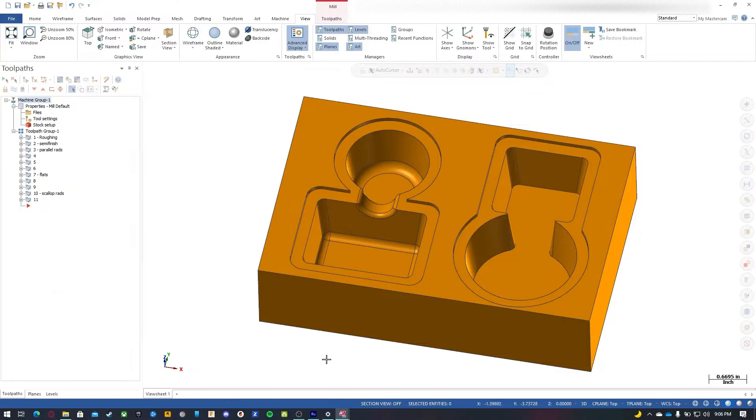Alright guys, now that we're back, I'm going to throw in my step file. Mastercam can import just by clicking and dragging a file. So now I've got my solid imported already. You can also open using this, or even clicking on merge, and select your SolidWorks file, a step file, STL, or anything like that.

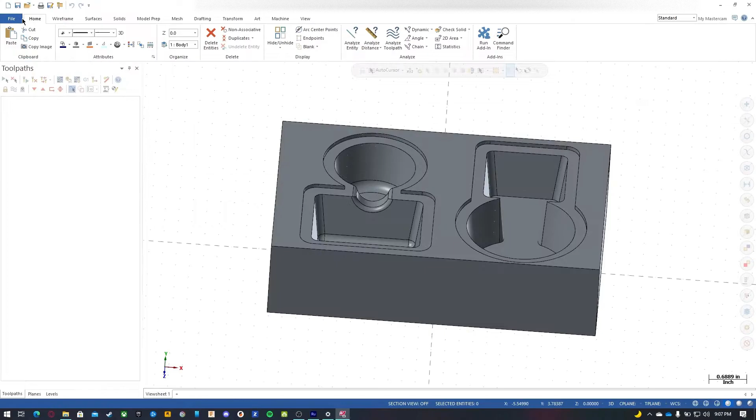For instance, if I want to just open this file, I would click open, and I have to click all files, or if I knew the extension to my file, I can click on step, and that will give me the available files.

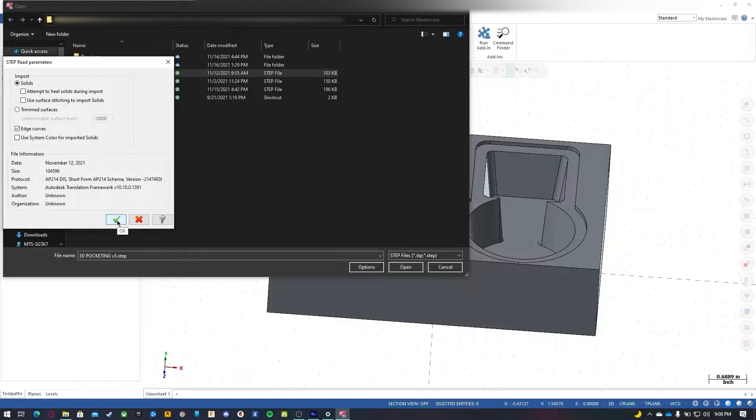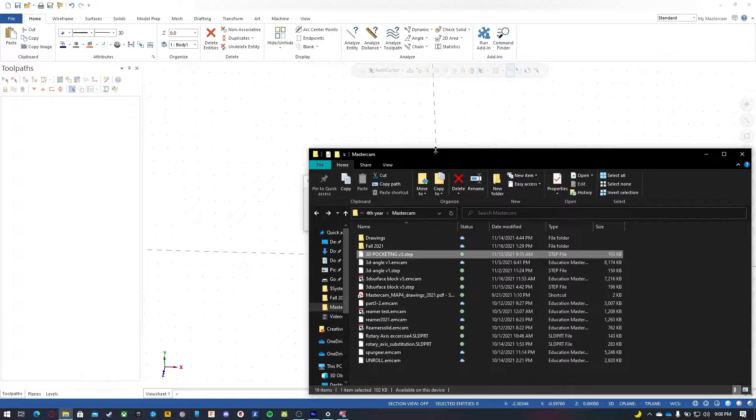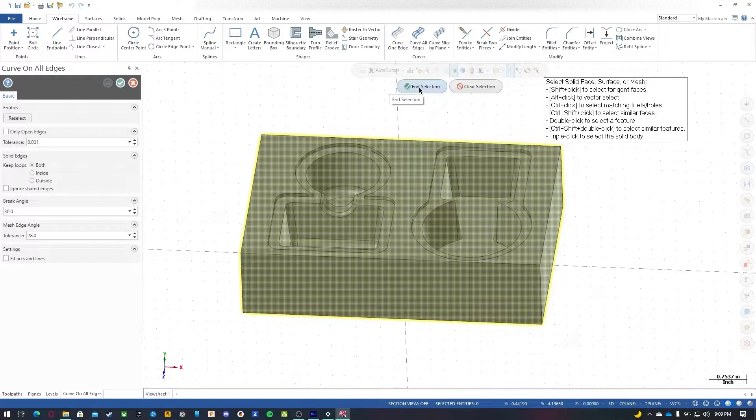Now if I imported my file and it didn't have any lines, what I can do is go to my wireframe and click on curve all edges. Now I can triple click to select the solid body, and then I can move this window out of the way and click end selection. Now this is going to put all my outlines on everything. That'll be helpful for doing our boundaries for later.

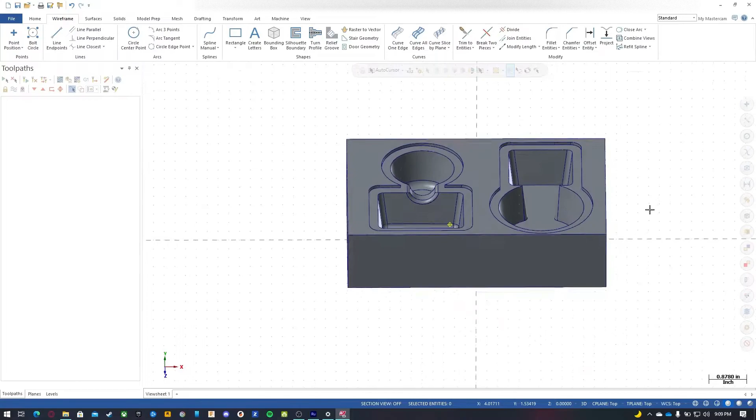So since I've started with a new file or part, my geometry needs to be oriented. If I click on my top view, that is actually my front view. So what I want to do is rotate this so that the pockets are facing the top where the spindle would be. A quick and easy way to do this would be to create a new plane off of a face.

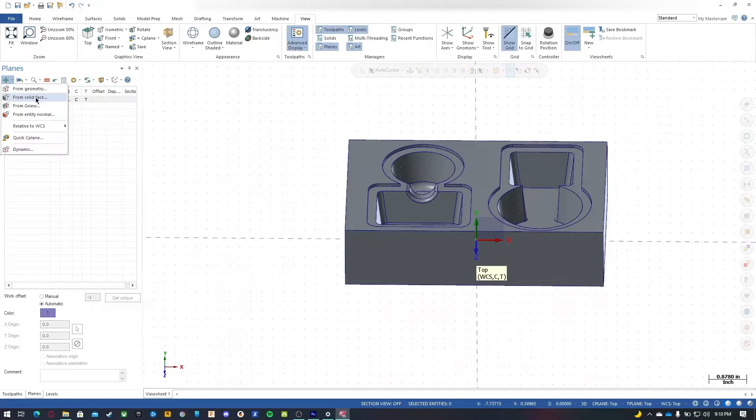So if I open up my planes manager down here, if it's not open, we can go to view and select planes manager right here. I'm going to click create a new plane, and we're going to select solid face. I'm just going to select that, and I want to orient it so that my X is to the right and my Z is pointing upwards. Then I can click OK, and I can name this pocket surface. So then I'll click OK, and now my grid is sitting right where I need it. That's probably the quickest way.

In other situations, you might want to actually orient your block by rotating it so that you have top, front, and all those views that correlate to the actual surface.

So I want to go to my machine and set default. For this video, I'm not going to show you how to do feeds and speeds, I'll leave that up to you, but I'm going to show you how to get the tool paths.

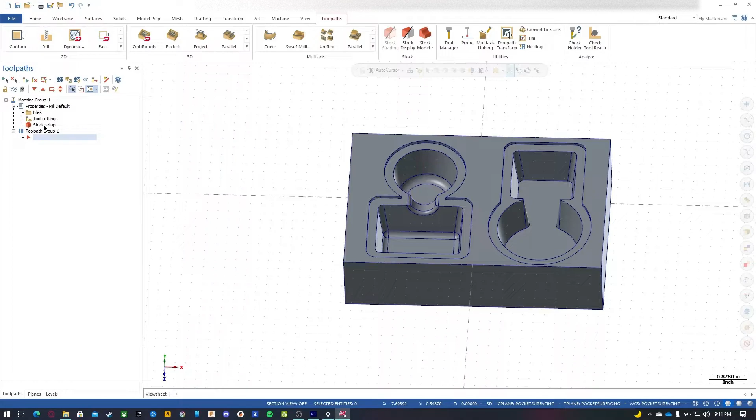So let's go to stock setup, and I'm going to click on all entities. This will enable my stock boundary, and you can see now I have my stock shading sitting within this block.

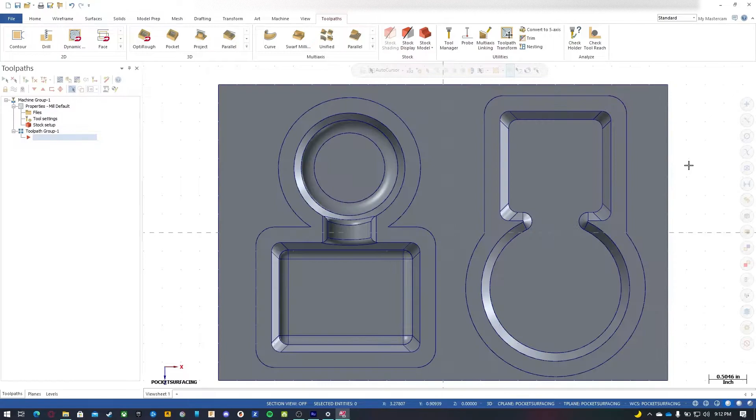So I'm going to turn that off, and I'm just going to click on the top view, and I can press Alt-1 or right click and press this top button. Let's go to tool settings and assign our tool numbers sequentially and warn of tool duplicates.

So click OK, and now the first thing I want to do is rough out these pockets. A really handy tool to use is OptiRough.

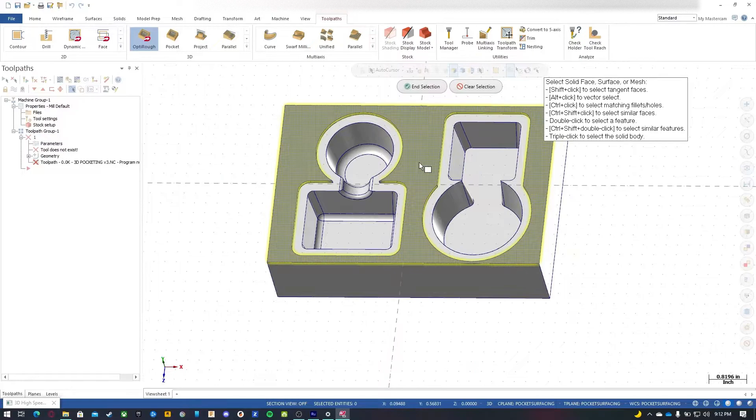Now we come up with this window, and this is going to be our machining geometry and our avoidance geometry. For this purpose, what we're going to do is click on this button and triple click to select the solid body. Now I have everything selected, and I'll click end selection. Now I have 62 entities available.

I'm going to leave 50 thou stock on the walls and 50 thou stock on the floors. We're not going to touch anything on here.

If we go to toolpath control and include our silhouette boundary, that's going to include the outside block boundary and contain the tool within the material. If I didn't have that, it would try and machine the walls. Let's say our stock is already to size, so I want to make sure I have that silhouette boundary, and I want my strategy to be on the inside to do the pockets.

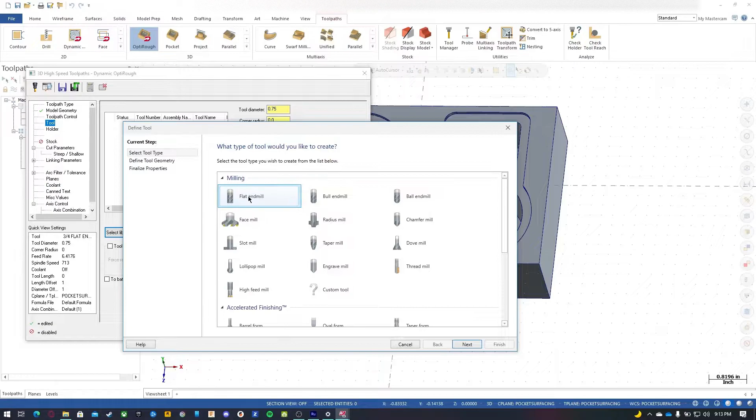I'm going to select a tool and create a tool, and let's go with a bullnose end mill. We're going to say this is a 3/8 bullnose with a 30 thou radius, and we're going to ignore our feed rates for this. So we'll call this rough pockets.

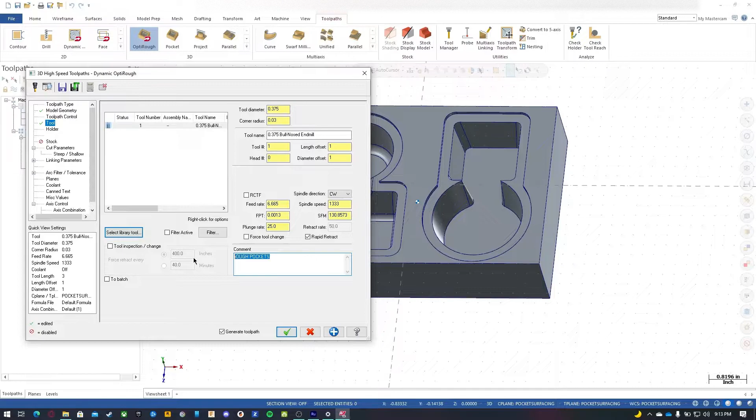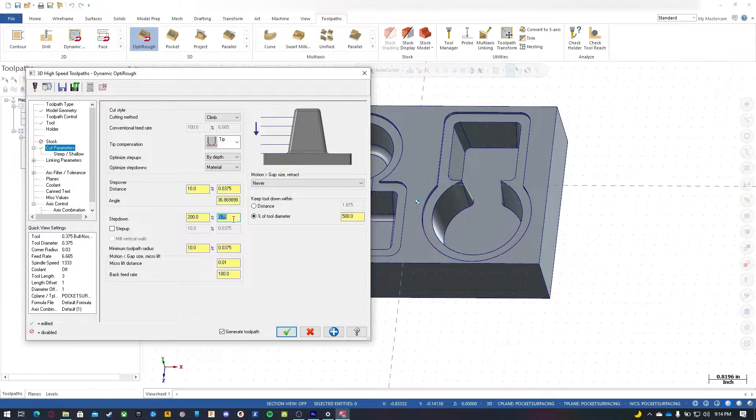My next step is going to be cut parameters, and we'll set our step distance to 10% so we can use a lot of the flute and not wear out the corners of our cutter. I'm going to use my step down and set this at 0.75 inches, and include a step up. So this will go down 3/4 of an inch and start machining as much as it can, and then as it goes up the tapered walls, it's going to step up 37.5 thou.

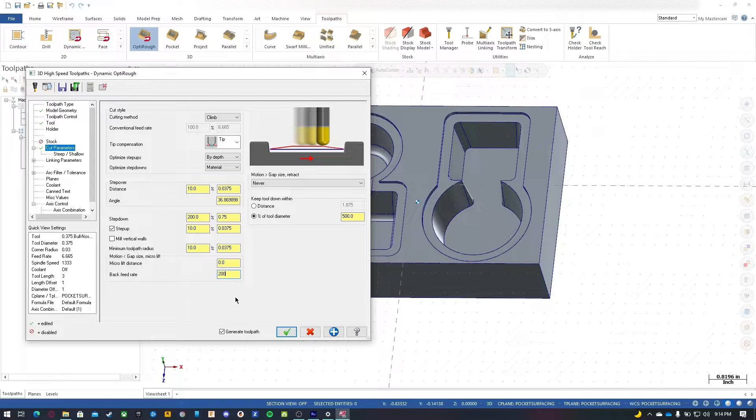My micro lift distance I usually set to 0, and I'll set my back feed rate to 200 or 500. I like to keep my percentage of tool diameter within 500 or 300%, so it doesn't do unnecessary moves. For small spaces, it'll just move over using our back feed rate.

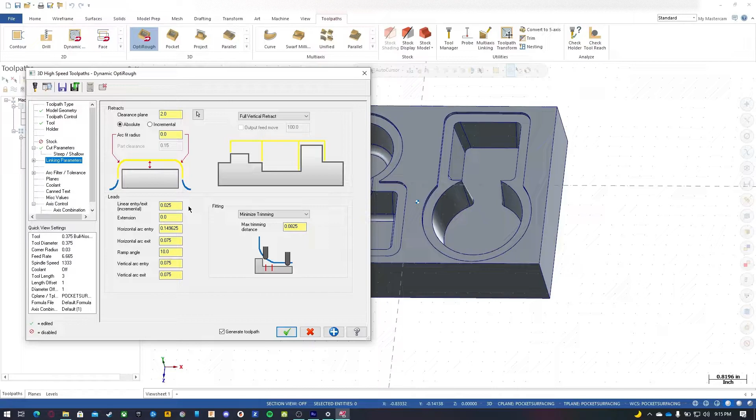My linking parameters can generally stay within the defaults. The only thing I really want to check at this point is my planes, and make sure they all say pocket surfacing.

Let's turn on our coolant and generate the toolpath. Okay, while this is generating, I'm going to collapse that, and I'm going to do a raster.

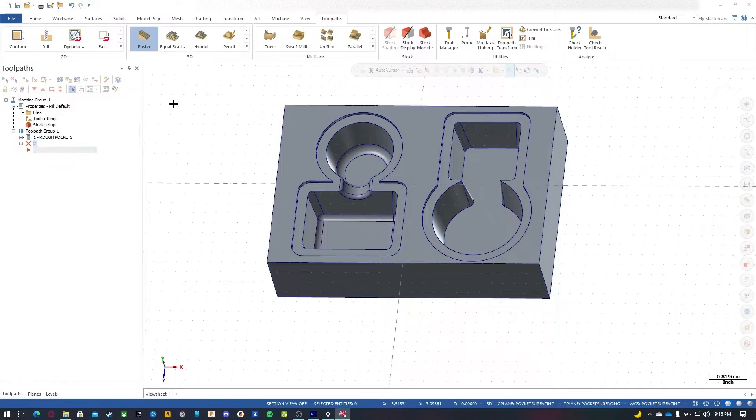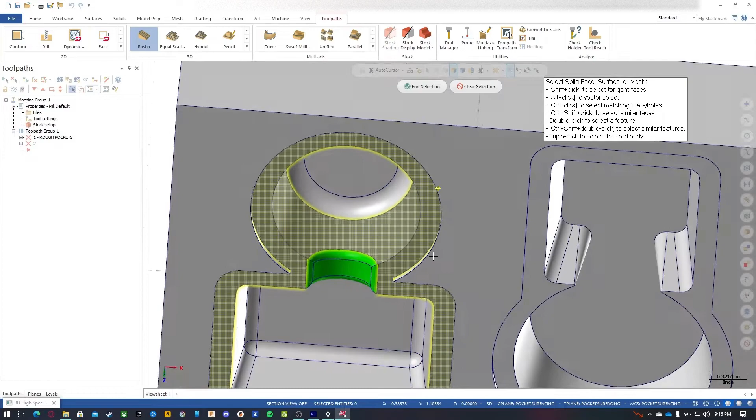I'm going to set this to these surfaces here. Now if I zoom in and roll it around, I should have only those surfaces, and I'm going to set my avoidance region tangent to those surfaces, so anything that touches those machining surfaces. If I hide my dialog here, I should have red touching all of the green. If I press escape, that should bring the window back up. I'm going to set these to 0.

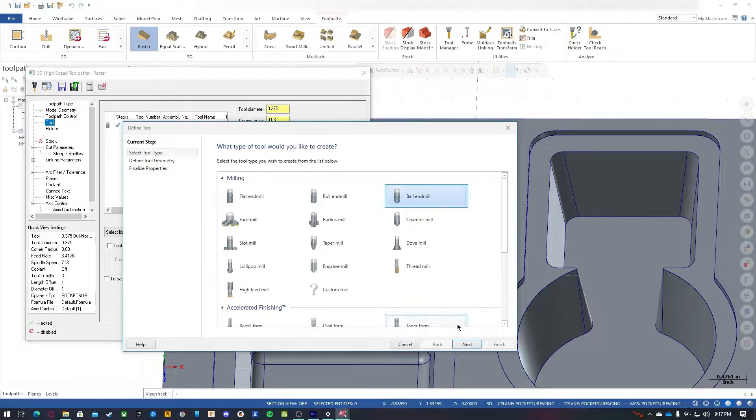Now I'm going to go to my tool and create a new tool, and this will be a ball nose end mill, and this will be a 1/4 inch. I'll click finish, and we're going to do a parallel on this small section.

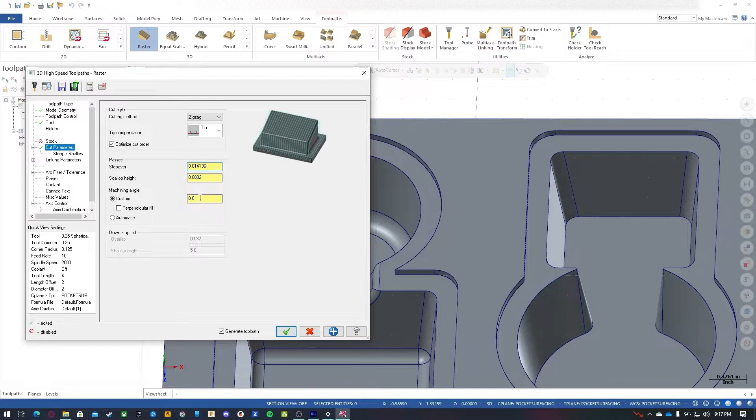So I'll go to my cut parameters, and I like using zigzag. I'll set my step over. This is usually pretty good surface finish with a 2/10 scallop height, which makes our step over end up being 14 thou. And we're going to leave our machining angle at 0.

We're going to go to our linking parameters and just verify that these are all within the defaults. If you've changed anything, you might have a good reason for doing that. If we go to planes, we should have surfacing, and we'll turn our coolant on and click OK.

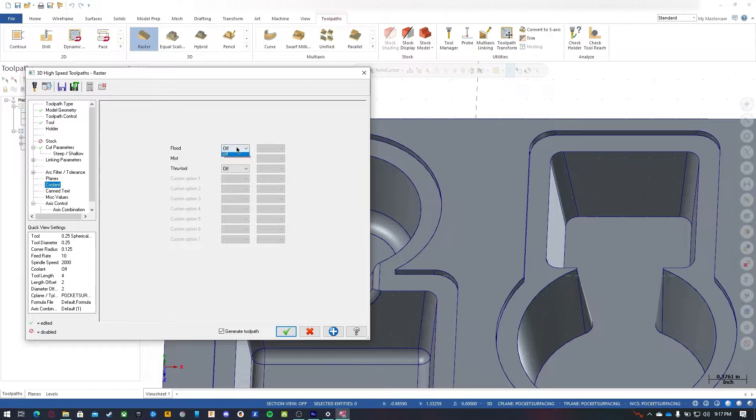So this is what my parallel toolpath looks like. But let's check our rough pocket since it was generating. Now we have some material being faced across the top, so I don't really want that. That's unnecessary for what we're doing.

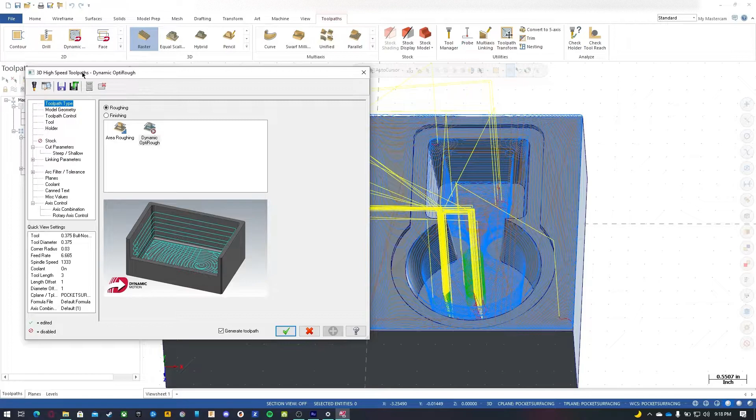So I'm going to go back into my parameters, and I'm going to go to my steep and shallow and set my minimum depth to -1 thou. Now this is going to generate, and it's going to do everything within the pockets now.

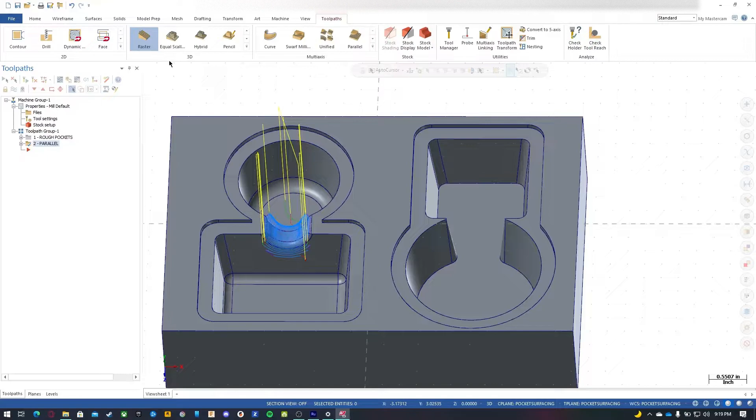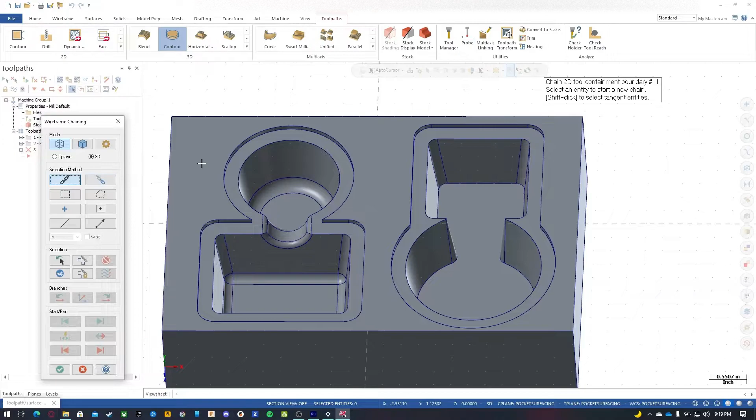Alright, so now that we've got everything generated for my roughing application and my parallel, I want to contour my pockets in here. So I'm just going to go to my contour, and I'm going to select the entire solid, so I'll triple click and end selection. So I have my drive surfaces. Now I'm going to set some containment boundaries. Now I can select using the geometry on the part.

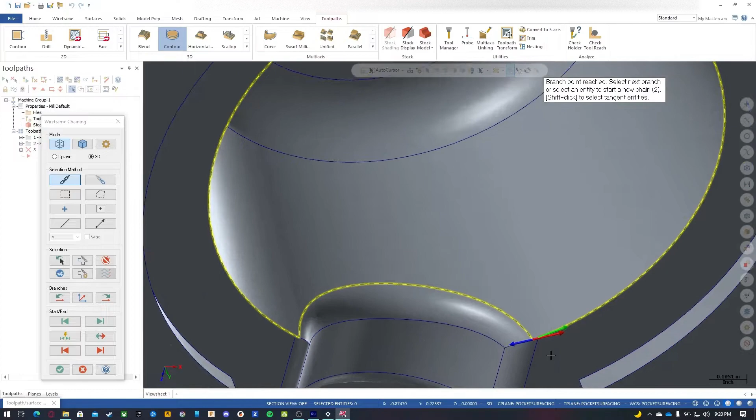Sometimes there might be really obscure lines that you need to chain, so I'd have to zoom in really far to get to this one. You can also click on the red arrow or even the blue arrow, and I just want to have this meet up with this green arrow. So then I have a blue and a green arrow, and that is my boundary.

So I'll click OK, and I'm going to use the 1/4 inch ball nose end mill, and we'll leave these as default. Now my maximum step down, I know that my scallop is going to be 14 thou. If you didn't have a tapered wall, it would be okay to do a larger step down. I'm going to go to climb and one way, and I will also use my follow surface.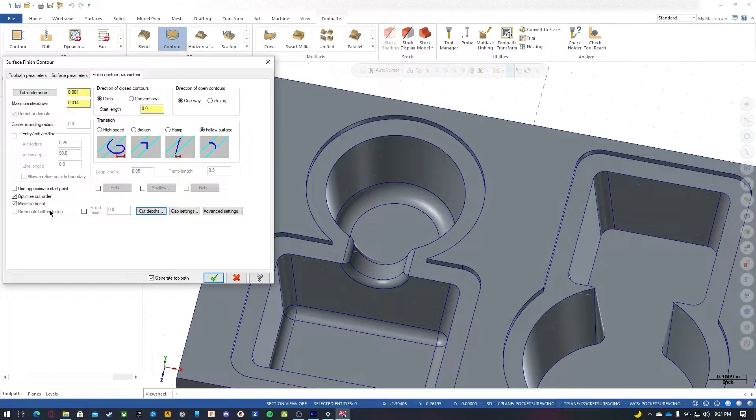So this is going to run around the edges and then follow the surface. I'm going to select optimize cut order, and then I'll click OK. Now this will generate for this smaller section. It might be wise to set up your toolpaths in sections so that you don't generate too much and then have a crash. Mastercam has some issues with generating toolpaths and crashing, so if you limit the possibility of it, it makes it a lot better. So let's call this contour round.

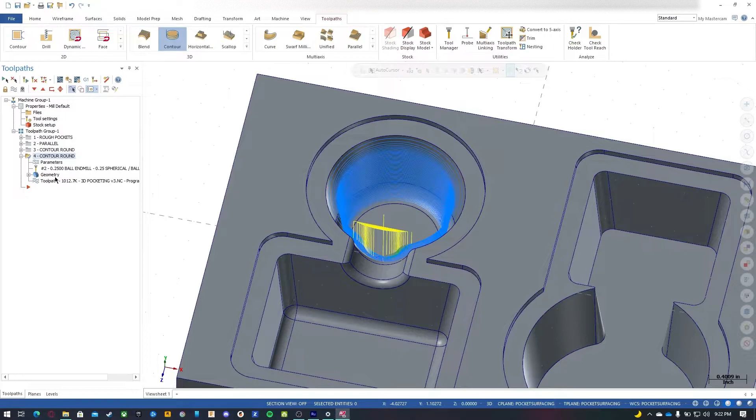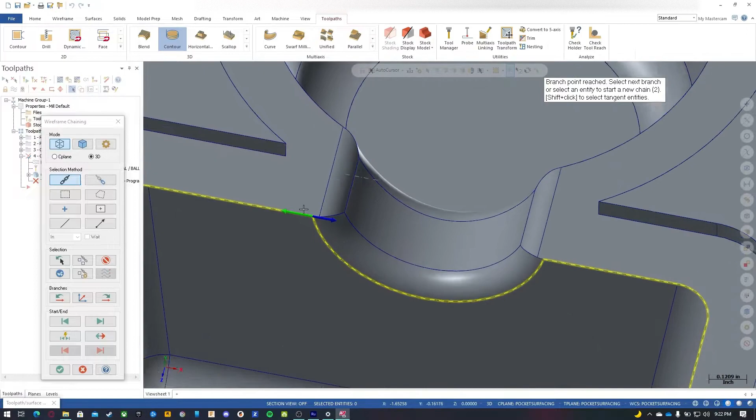And I want to copy this and paste it, and select a new containment boundary, and that's just going to be this one here. So I'm just clicking on the red arrow to go around, and I'll have to zoom in to this section here, and we'll go around our paralleled section. So click OK, and then we'll have this generate.

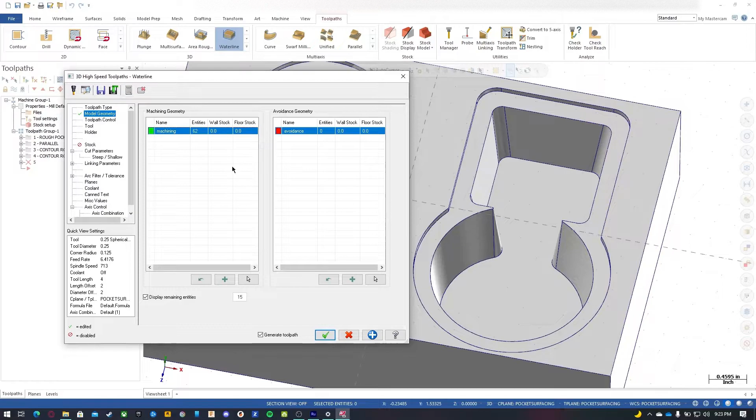So my next path, I'm going to use a waterline on this one. We click expand gallery, and we'll use waterline, and we're going to select the whole solid by triple clicking. We're going to set this to 0 and 0. And then we'll set our boundary chains, and if I change this to C-plane, then I can pick that chain. Otherwise, if I were to click 3D, it's going to stop at each branch. So to make it easy on you, you just click C-plane, make sure the chain is selected, and click on that.

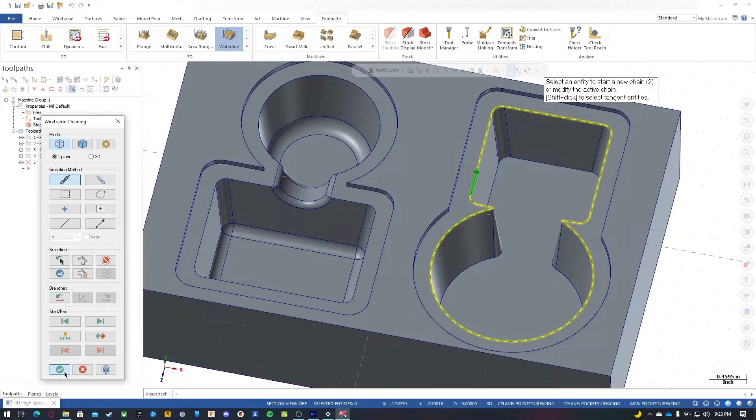Now I want to make sure I have tool contact points selected. That means if it goes outside of the boundary, the only reason it goes outside is because of the tangent point of the radius. We're going to continue using our 1/4 inch ball nose, and we're going to waterline a large pocket.

We'll go to cut parameters, and we're going to go from bottom to top, one way and climb. Actually, let's go climb spiral — it gives a little more gentle movements. My step down is going to be 14 thou, so we figured out our scallops. And we don't need to add cuts because we don't have any other tangent walls that might change angles.

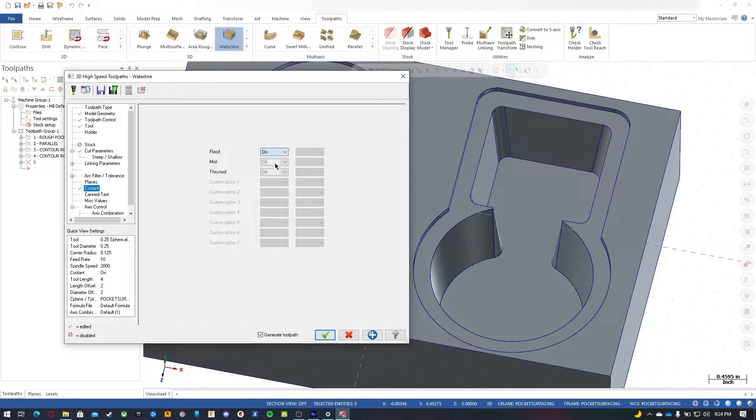You can also have waterline step over on floors like this. I wanted to go to my planes, make sure that those are good, check my coolant, make sure that's on, and click OK. Now this is going to go from bottom to the top upwards.

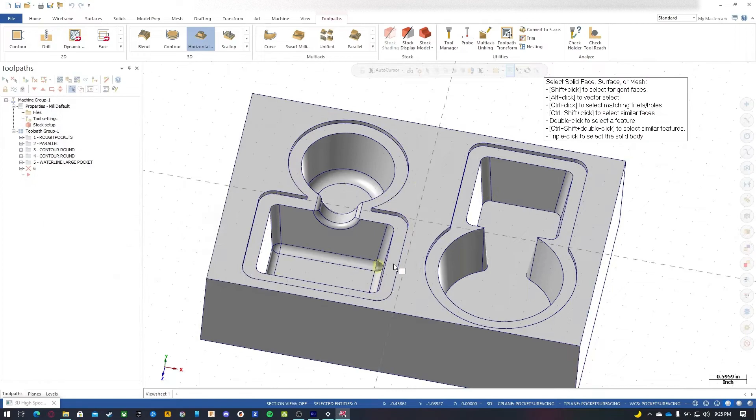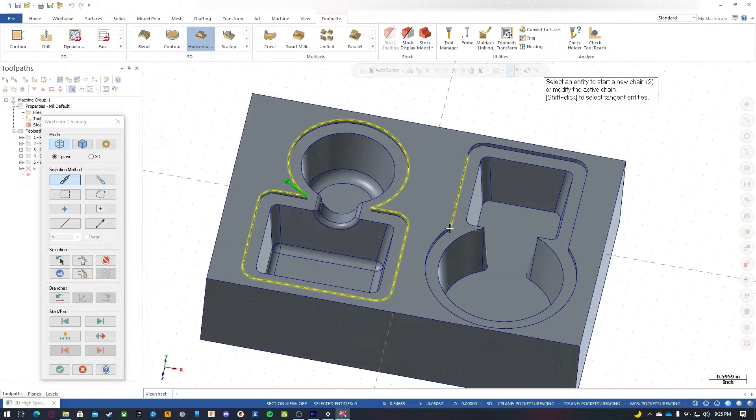Now my next toolpath, I want to cut these flats. So I want to go to horizontal. Once again, I'm going to triple click on the solid and set these to 0. Now my toolpath control, I'm going to set my boundary chains, and we're going to use the C-plane boundary, and I'll use that one and that one. Click OK.

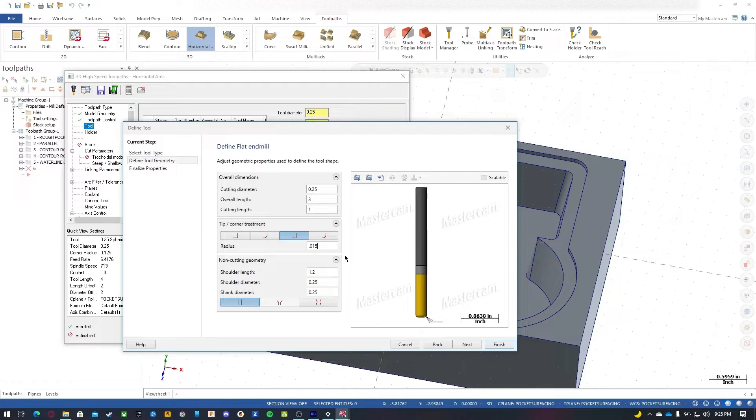And we go to our tool, and I'm going to create a new tool. We're going to use a bull nose end mill. We're going to give it a 1/4 inch diameter and 15 thou radius on the corners. Now I'll click finish, and we're going to flatten the bottoms.

Now if we go to cut parameters, I'm going to change this to 1 cut, and we're going to do an XY step over of 45%. And I'm going to change this to 500%.

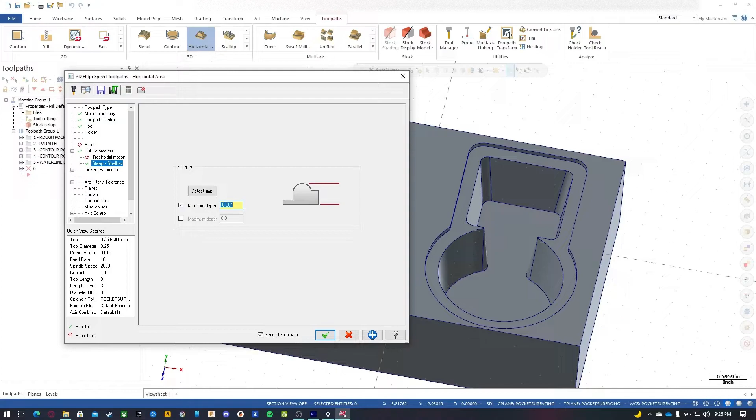Now my steep and shallow, I want to make sure that this is negative 1 thou once again, so we don't do the top, but those boundaries should help contain it. And I'm going to make sure my plane is correct and coolant is on.

So now this is going to do these top surfaces and the bottom surfaces in everything, and it has a helix that will enter in.

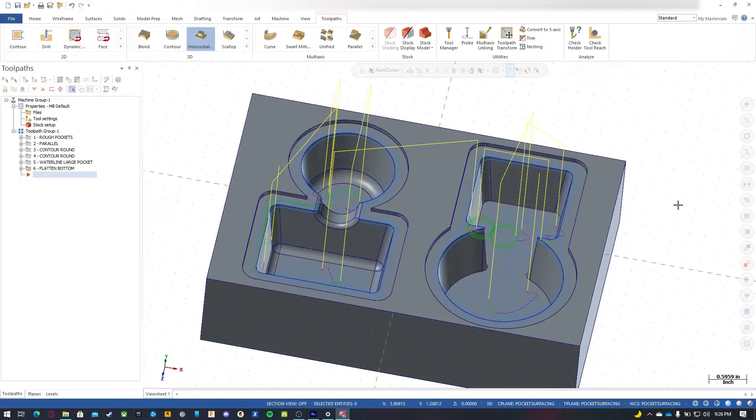Now if we were to verify these operations, now this is going to be my roughing, so it'll open up my pockets, and then it'll start doing some step ups.

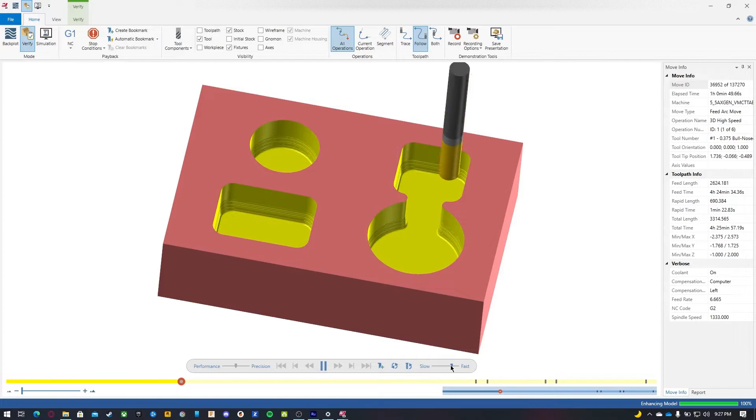Now I'm going to turn on my color loop by pressing verify and click color loop.

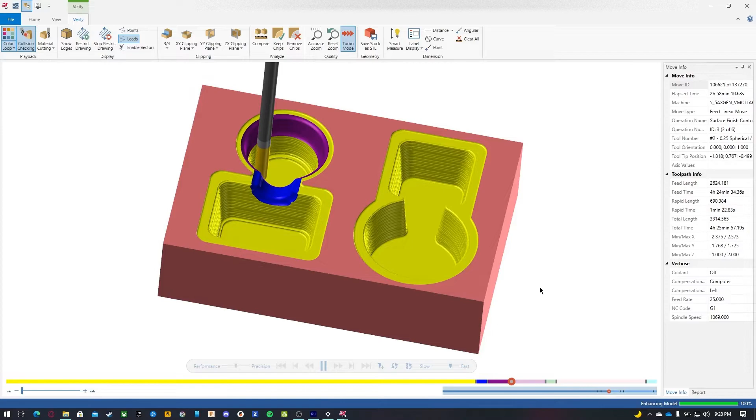And my next operation is going to be that parallel toolpath. And then I'm going to do my contour to do that inside boundary. And then my contour for this one. Now we're going to use Waterline, bottom to top.

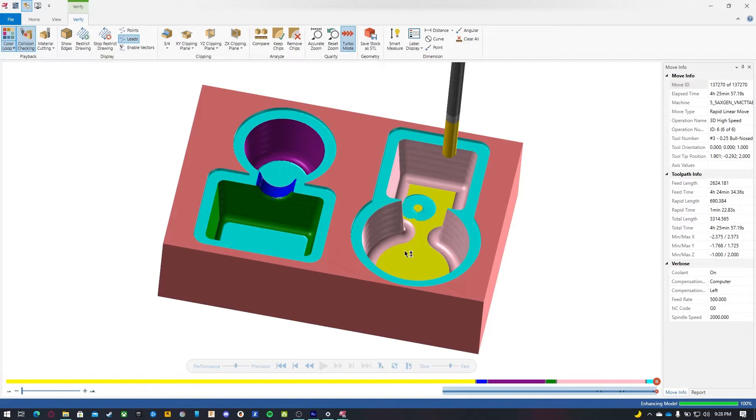And then what we'll do is we'll go in with our 1/4 inch end mill and flatten the bottoms. Now you can see in here there's a little bit of a scallop left over because of the 1/8 inch radius on the ball nose versus the other end mill that we're using.

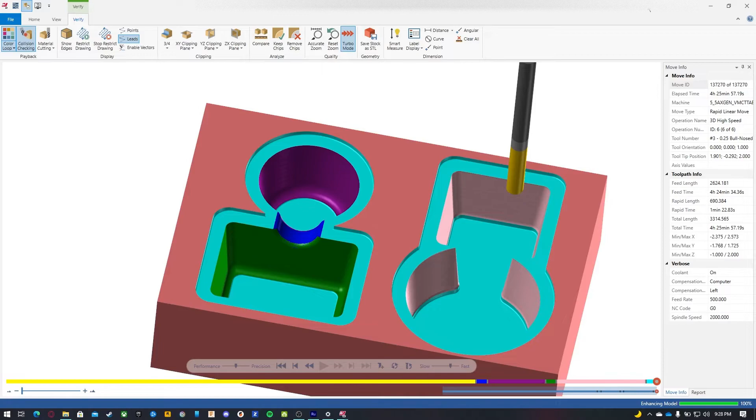And down here we have a little bit of material left over from the ball nose. So we're going to have to go in and clean that up. So how I'll do that is I'll use a Waterline. Once again, I'll just copy this and paste it.

And I'm going to use my steep and shallow with a minimum depth of negative 0.9. So it won't go any higher than negative 0.9, but it'll go all the way to the bottom inside of that pocket. I'm going to make sure that I have the correct tool set, so we'll use that 1/4 inch bull nose.

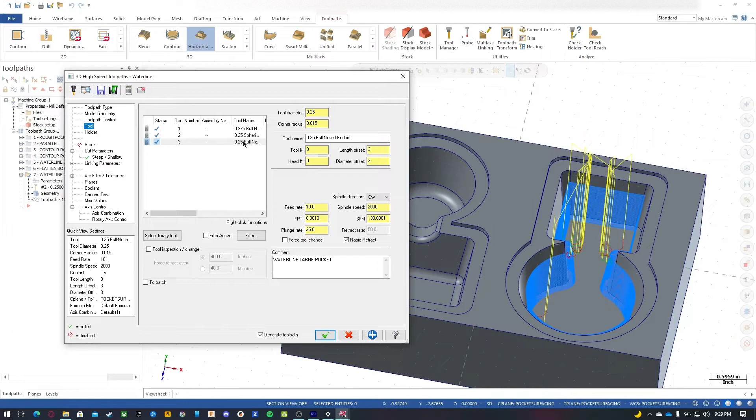And we're going to change the step downs to 3 thou. We're going to continue going bottom to top, and we're going to climb spiral. And that should be it.

So now it's going to do a small little section to clean up what was left over.

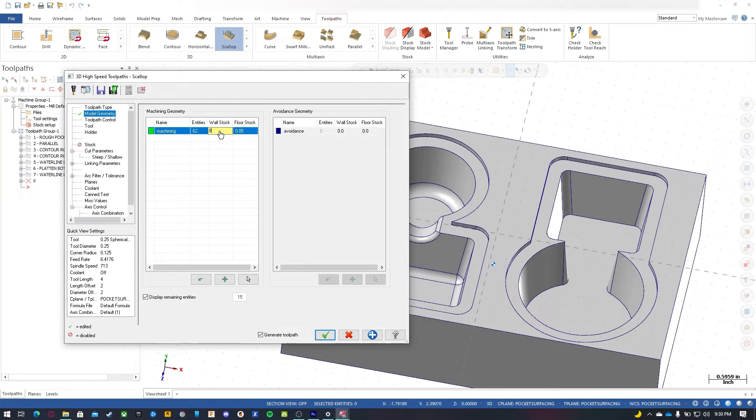Now, in the bottom here, I might want to do a scallop for the faces. So what I'll do is I'll just triple click on my solid and set my stock to 0 on both, and then go to my boundary chains, and I want to select this boundary, and I want to select this boundary.

Now I have to go into 3D, so I might have to cancel that one and go around this bottom part, because I don't want it going any higher than my radius.

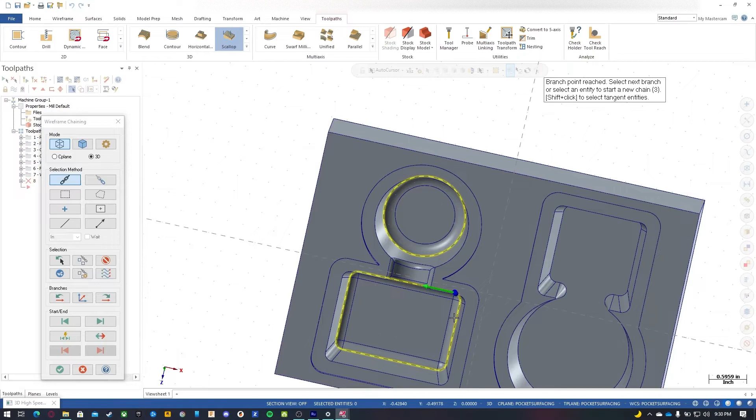I want to set my tool contact point, and we're going to make sure we have a spherical, and we'll go into our cut parameters and set this to 14 thou for step over, or you can set your scallop height to 2/10.

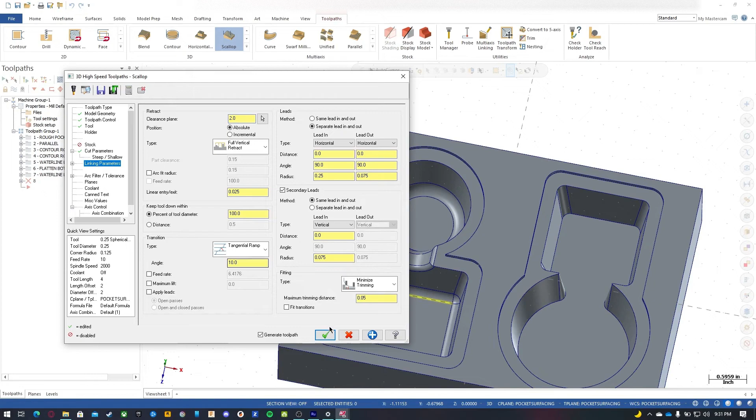Now you can also control the distance or the height that it will go on those radii, because 0 degrees is going to be a flat bottom. Now if we take a look at it, with 0 to 90, it's going to put in the entire bottom.

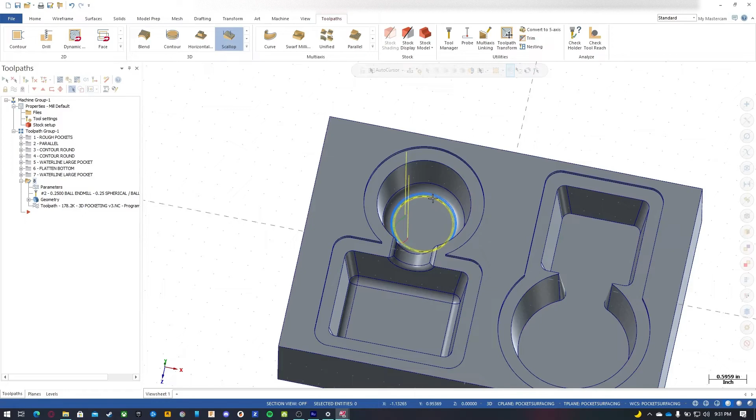Now I might want to go into my steep and shallow and change this to 1 degree. And now it only limits itself to this one. However, this one needs a little bit more. So maybe we could drop it to 1/2 degree. Nope.

So now that I've got my toolpath like this, I'm going to name it. And we're going to do finish bottom surface.

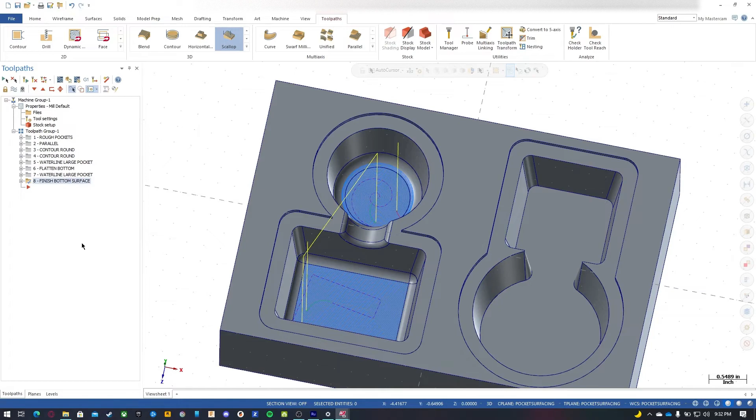Now if I select all of these and go to my verify, it'll rough out my pockets.

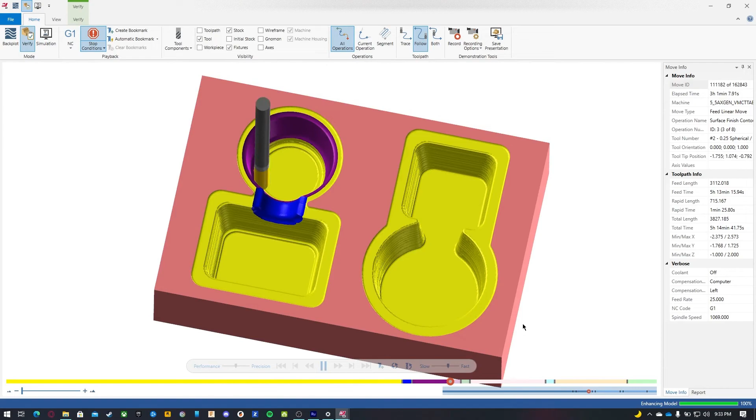And then I'm going to parallel, and then I'll contour my pocket, and the next one, and then I'll waterline, and then I'll clean up the flats, and then this one will go down and clean up this small section down here.

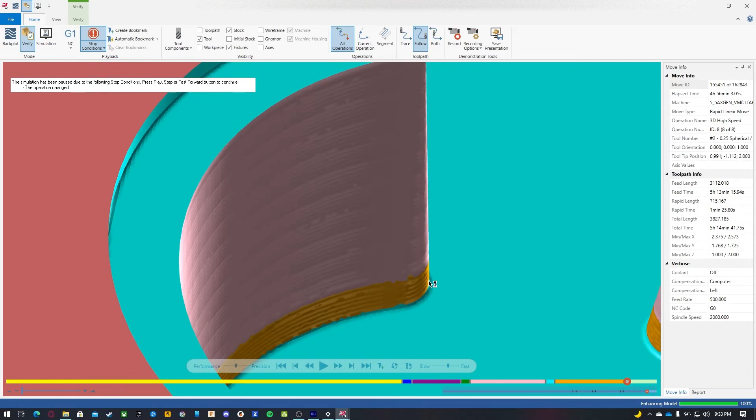And now my last toolpath, we're going to clean up those bottoms, and you see how it kind of blends everything in. So that's 3D pocketing in a nutshell. Thanks for watching.